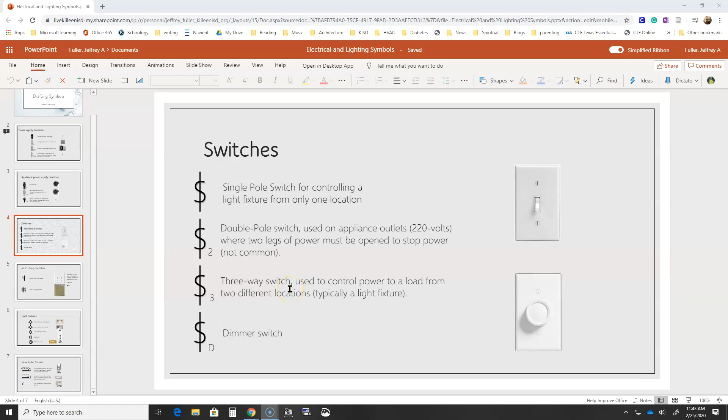Okay, now the next page, I've got some of those multiple gang switch boxes. So this box right here is a 2-gang. This one down here is a 3-gang. Okay, and you may have some of those in your house.

But this is a double gang light switch. It may have two single pole switches in it, or it may have a combination of switches, such as this example that I got here. If switches are two-way or three-way, it must be indicated at each switch symbol.

So if you have a triple gang box, in this instance right here, you may have a three-way, a two-way, and a single pole. Well, actually, probably not a two-way. And again, as I said, those are very rare. But you might have one single pole, a couple of three-ways, or maybe two single poles in a three-way, or maybe a single pole two-way or single pole three-way in a four-way. So that would have to be indicated at that box.

But again, these are single gang. This is a single gang. And these are 2 gang, 3 gang down here. You can have multiple gangs. I've seen them personally with as many as 6 switches on a box. And that's it for actual lighting symbols and comparing them to what they would look like in real life. Now let's get over to Revit and I'll show you how to place these.

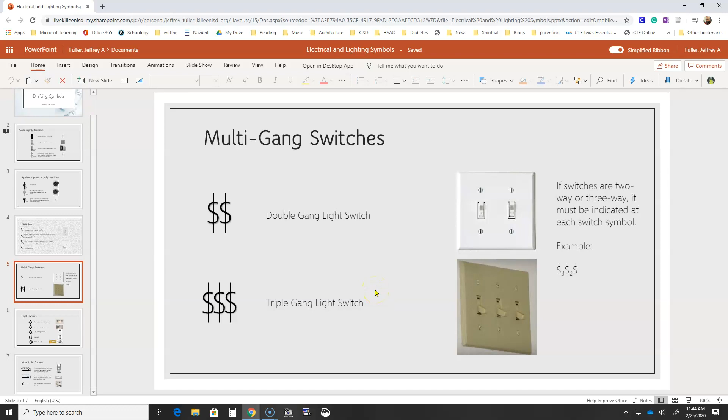Alright, so let's place some switches in order to control our light fixtures. Here in the living room, typically the living room is a place that you will find uses for 3-way, sometimes even 4-way switches. Okay, and you'll have to think about, where would I want to turn this on and off from, and then of course have the different switches and things like that.

So here in the living room, you'd typically want to be able to turn it on coming in the front door, and you'd probably want to be able to turn it on coming in from the kitchen and even coming from downstairs. So there's basically 3 locations, but 2 locations primarily that you'd want to control those lights from so that you can turn them on before you stumble over the furniture. Which, if you remember, I hid the furniture for the living room, so the furniture is still there. And I'll show you how to unhide that in just a moment.

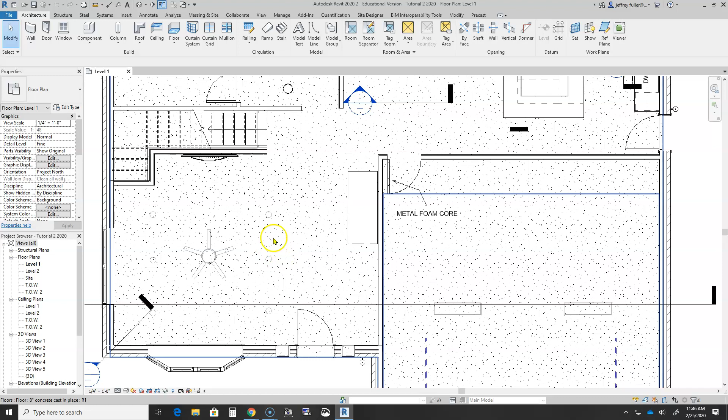But I'm in the living room right now, and a couple of things I can do to help myself out along the way is, I may want to hide some of my elements, such as the floor, in this case, because it can get in the way of selecting some of your light fixtures and your fans and stuff like that. And of course there's lots of things like that involved in using Revit. So it's kind of like turning layers off in AutoCAD, but we're turning elements off in Revit.

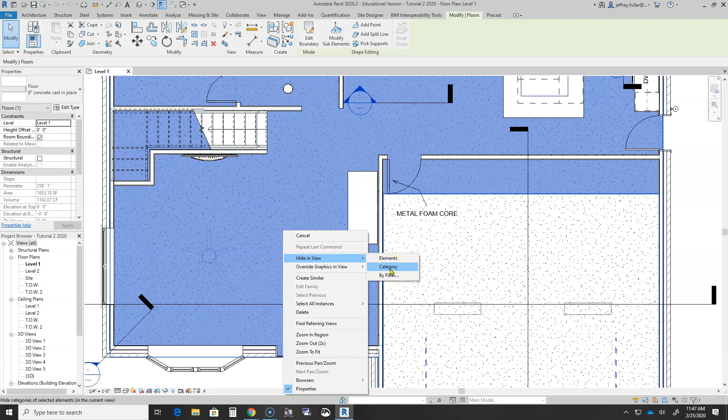So I'm going to right click on the floor, and I'm going to say hide in view, and I'm going to say category, because I'm going to hide all the floors while I do this, so nothing gets in my way. Now I think this is just going to do it on the first floor. I thought maybe it would do it on both floors, but I'm going to hide the category, so I see no floors at all whatsoever. Now they're just hidden; they're still there. And that way, it's easier for me to select individual light fixtures and what have you.

I don't know why those stairs light up every time I hover over my light fixtures, but maybe we'll find out sooner or later. Anyway, let's put some switches on this wall right here. So I'm going to go to the components. No, I'm not going to go to the components. I'm going to go to systems. Systems tab right up here, about the 4th one down. And we're going to go to devices, electrical fixture. And when they say electrical fixture in that application, they mean a receptacle or a switch.

And I'm going to come here and go down to the type selector. And you can see right now I have a 3-way switch that's already kind of preloaded in there. If I want to load more, and actually what I do as I'm doing the electrical, because I will come across instances where I need different switches and different receptacles, I'll go to load family.

So we're going to go to the electrical folder, and we're going to go to architectural, and we're going to go to, I think, electrical power. Yes, and then we're going to go to terminals. So your light switches and your receptacles are considered terminals. Now we're strictly going to work with light switches first in this video, and then the next video I'll go over some receptacles.

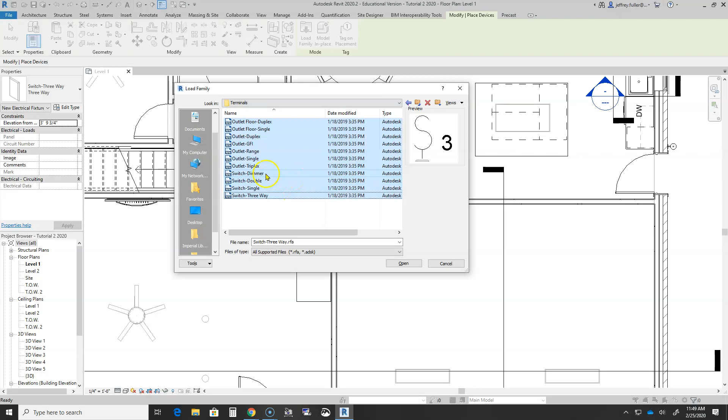So I'm just going to go ahead. There's only, I don't know, what is that, 12 or so electrical fixtures. I'm going to go ahead and select all those and click open, and that just puts them in the job. So when I go to select them, I can actually select them all over here through the type selector. So now they're all inside the type selector.

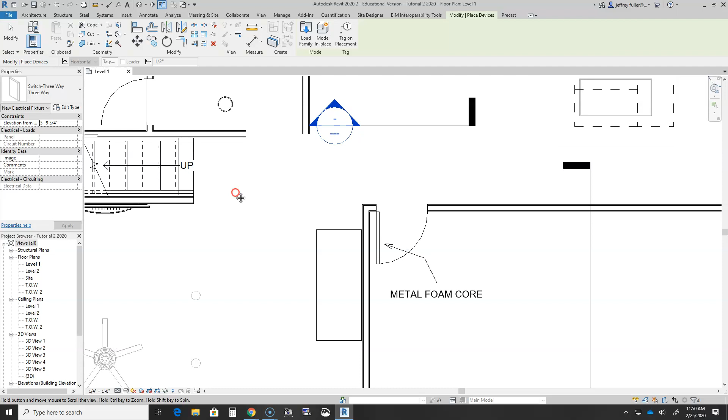Okay. What I want first is a three-way switch right there at the bottom. And I am going to put a three-way switch here that's going to control, let's say, the fan. And the fan also has a light fixture on it. So I'm going to put a three-way switch here. And that switch itself is just going to control the fan fixture. It's going to control the light on the fan, and it's going to control the fan.

Now, if I wanted to control those two separately, I would actually put two switches, one for the fan and one for the light that is on the fan. But I'm going to just use the pull chain on the fan to control the lighting and the fan itself.

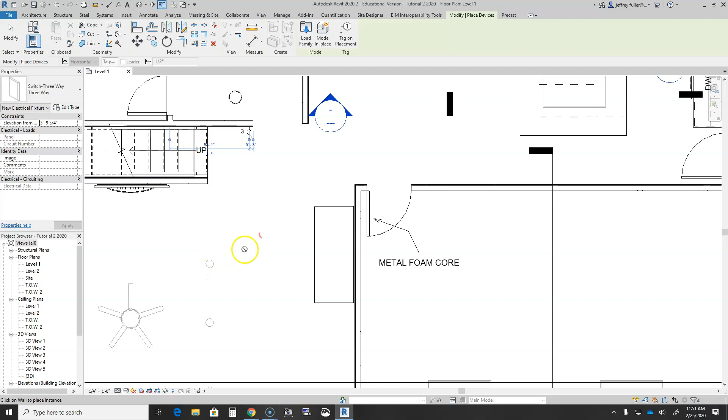Okay, and next I have these can lights in here. Now I don't have to control both the fan and the can lights from two different locations. I primarily just want to be able to turn the lights on so I can see from two different locations. But then again, I might want to have full control over everything in those two different locations. So I'm going to put another switch for the can lights, and I want to give it room so you can see it and read it.

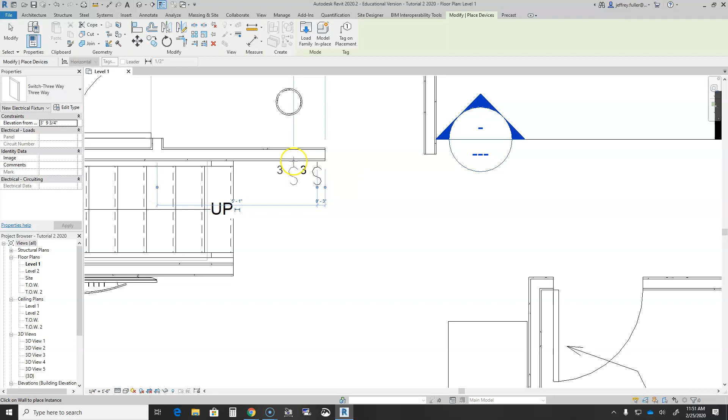Now this does not mean that they're going to be placed on the wall this way, and I'll show you how we deal with that. And of course most electricians would know when you have multiple light switches on the design on the paper like this, then that means they're going to put it in a multiple gang box.

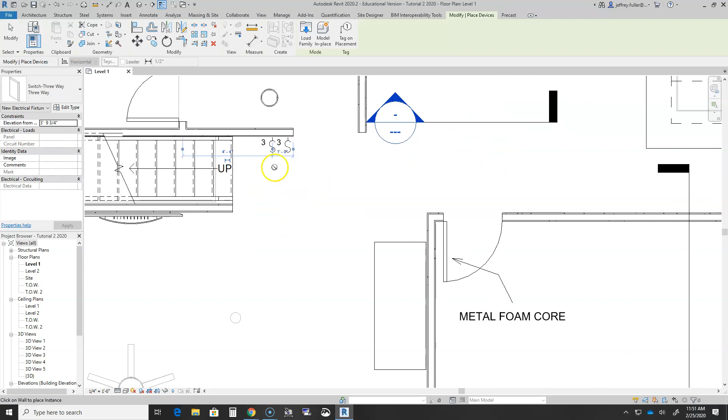So that's two three-ways. I also have to think about the stairway lighting. There is a light up at the top of the stairwell, and I probably need to put a light somewhere here in the middle because you don't want to walk up dark stairs. So that includes yet another three-way switch. So far I've got three three-way switches on there.

One switch for the fan, which controls both the fan and the light on the fan. One for the recessed lights, and then one for the stairway light. Again, that's up here at the top of the stair. Hopefully it would cast enough light to be able to illuminate most of the stairs. But if not, I'll think about putting maybe a sconce or something here on this wall.

All right, now that I've got those light switches in place, of course I would want to go through the house doing the same thing in all these different rooms. Same with the kitchen. I'll probably want to control the lights in the kitchen from multiple locations, so I would use a three-way. Bedrooms are a little bit different. Okay, bedrooms typically you just control from one location.

So I might want, say, a switch double, switch single. So just a single pole switch. And the namings on some of these are kind of confusing because people who make the models for these come from different backgrounds, and they kind of talk about things in different contexts. But there is a triplex. No, that's an outlet. I thought there was a double.

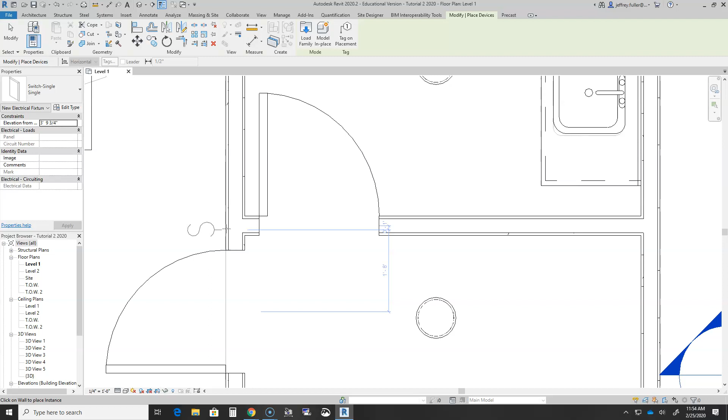You don't have to worry about height. Revit knows how high to place these, and we will talk more about that in just a moment. But I'm just going to put a single switch in there, and that's going to control the fan. Well, maybe I want one switch to control the actual fan blades and one to control the lighting. So there I would put two single pole switches right inside the door and indicate that as such as well.

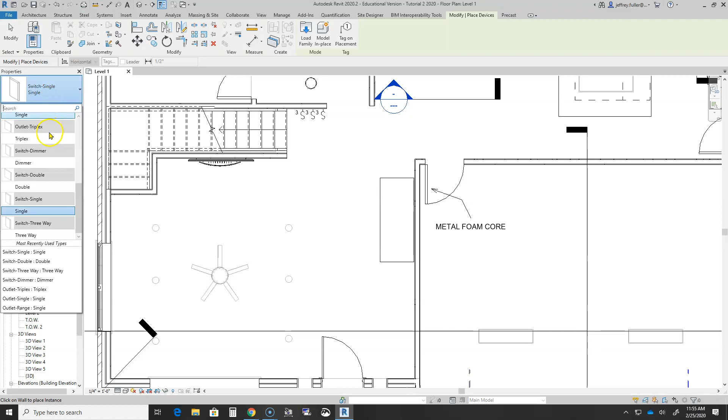Back to our living room. Of course I need a second location for some switches. So I'm actually going to go back to that three-way switch right here. And I'm going to put some switches right inside the door. Now, this is important. I don't think my door should be facing this way, so I'm going to double click to get out of the placement switch tool. I think this door should really be facing that way. Okay, and it just works better that way. And then I can put my switches right here on this wall.

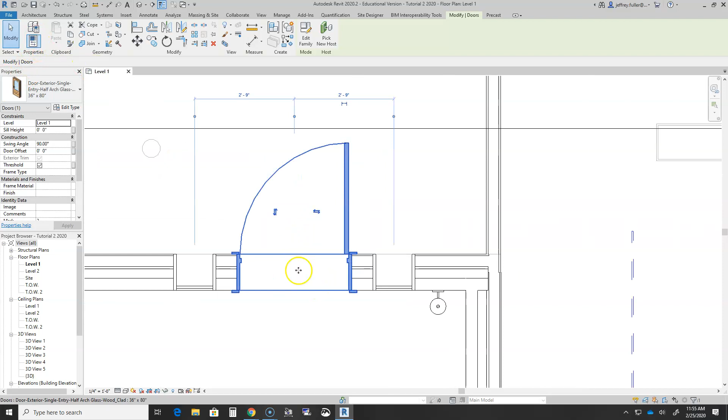Now, of course, I'm not sure how many switches we'll be able to get in here. They might have to be installed over here on this wall. The electricians could actually make that decision once they get on site, and that is because I have these sidelights that are basically windows, and there's not a whole lot of space between those windows and my door.

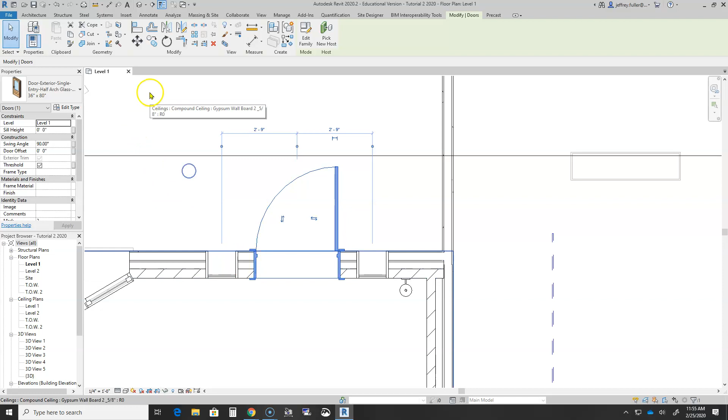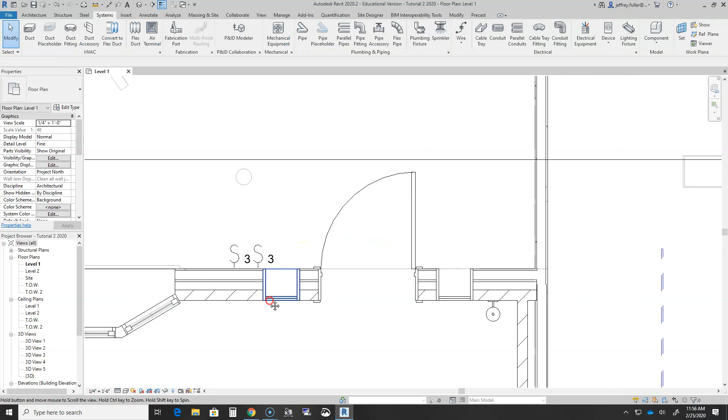So I'm going to go back to my systems and my electrical device, and I'm already on a three-way switch. So let's see, how did I do it over here? I had a three-way for the cans and a three-way for the fan. So I'm going to just place these three-ways along this wall and put enough space between them so that you can see them. And I might actually tidy that up just a little bit when I get rid of that one. Okay, so there's two three-way switches.

I don't need to control the stairway from here. But I do have an outside light fixture right there that I need to control. That's going to be on a single pole switch. So I'm going to go back to lighting devices, go to that single pole switch, and put a single pole right over here. And actually, I want to change the order of that around. I think that single pole for the outside light should be first, and then these two can scoot over.

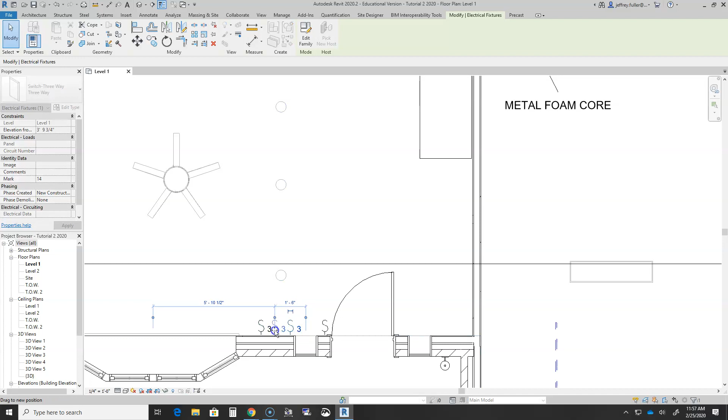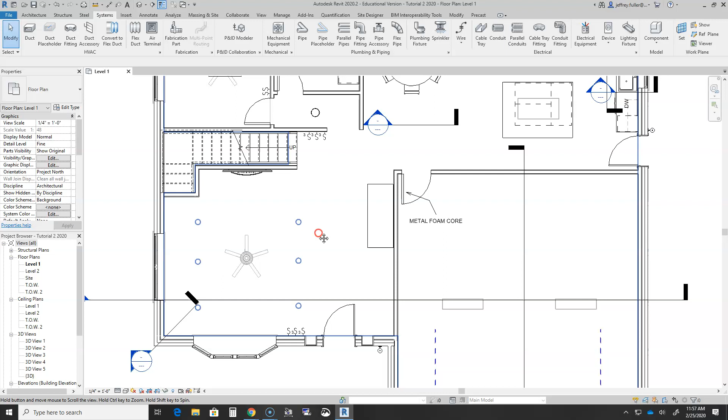Okay, and I'll come back later and put an annotation on this, and I'll cover that when I go over annotation in the video, but I'll annotate some of these to give further instructions on what to do. Okay, so now that we have some switches in place, I can show you what to do with the wire. This is the wire tool right up here, and still we're in the Systems tab. Click on wire, and I always use the spline wire. That's almost exclusively what I use.

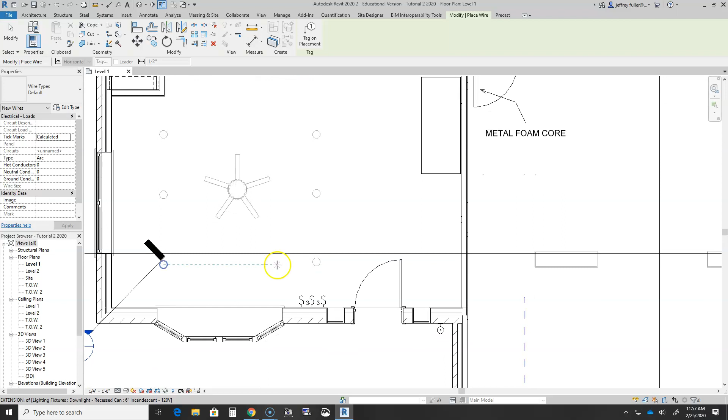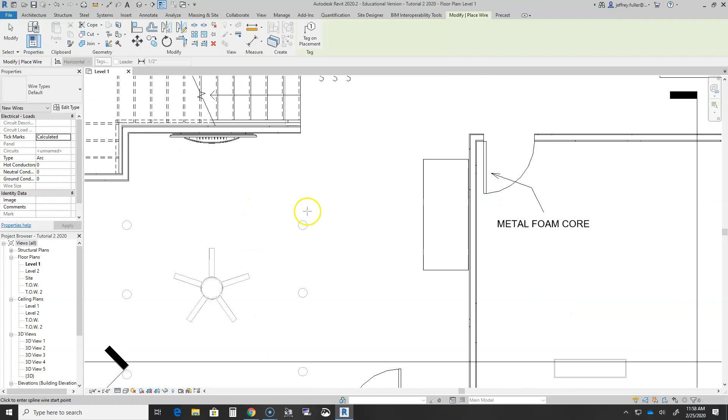And as I use these wires, it's very important to put curvature to the wires to make them, one, look kind of like wires, and two, so that they don't get confused with anything else in the drawing. So we can look at it and say, okay, that's definitely a wire, because it's going to the light fixtures from the switches, and it's kind of squiggly looking. Okay, so let's start up here. I'm going to use this three-way switch on the end to control the lights.

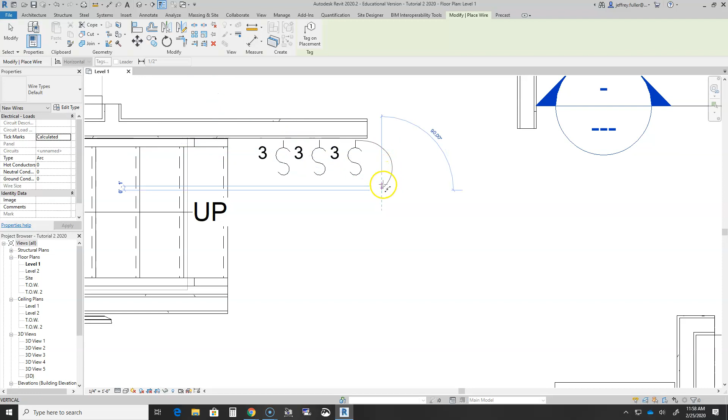So I'm going to click at the base of it, and that's where my wires can come out of. And I'm going to do a lot of clicks. So every time you click, you create a turning point. So basically, I clicked 4 times right in there because I wanted to come out from that switch, obviously. I want them to be able to see these wires.

And then as I go, I'll increase that distance between clicks. And I'm not going to make a zigzag line or anything like that. I'm just going to put some curvature to it. All right. And now as you click, I just hooked it up to that first light fixture can. And then I have to click on the can again to start it all over, and kind of go in place some more curved lines.

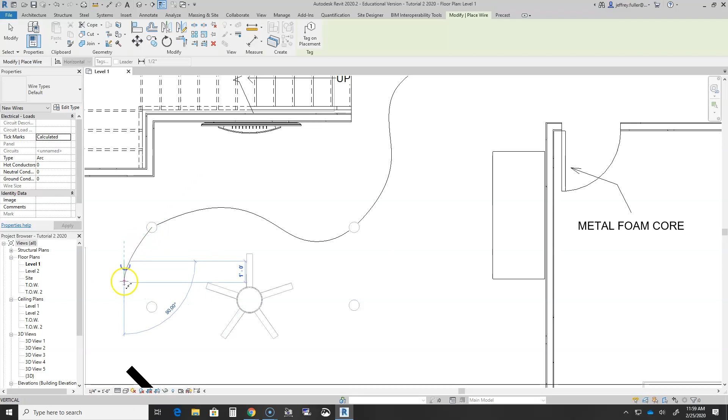And as you notice, I'm kind of doing this neatly. I'm not making these zigzags all over the world. So I'm kind of using a little thought in this. I don't want my plans to look like I'm unprofessional. Okay, so I'm going around to each individual can. Okay, this is the last can.

Once I make it to the last can, I'm going to circle around and go to this other three-way switch. And I want to put a little bit more curve right there. So I'm going to put a few more clicks in it. Go right to the base of it, and that'll be fine. Okay, now to finish that, you just right-click. I thought... Okay, hang on. Now hit the enter button. Okay, now enter button, that'll terminate it and you get out of it. Okay.

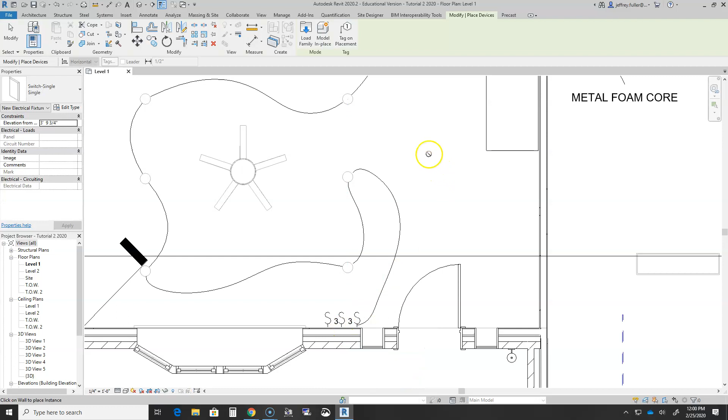So here we are. We have wiring from that one three-way switch going through one time through all the light cans and then back to this other three-way switch. All right, next I'll do this other three-way switch, and this is for the fan. Okay, so I'm just going to click at the base. I'm going to kind of snake it out the best way I can to keep it from crossing. Oops, I actually just made a bunch of copies of that. Let me undo. There we go. I forgot to click on the wire again.

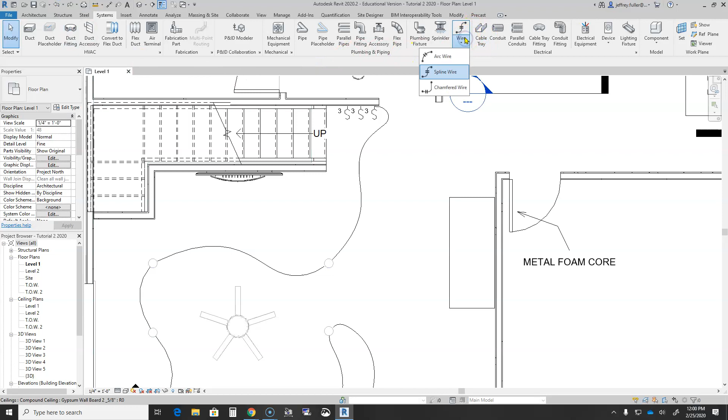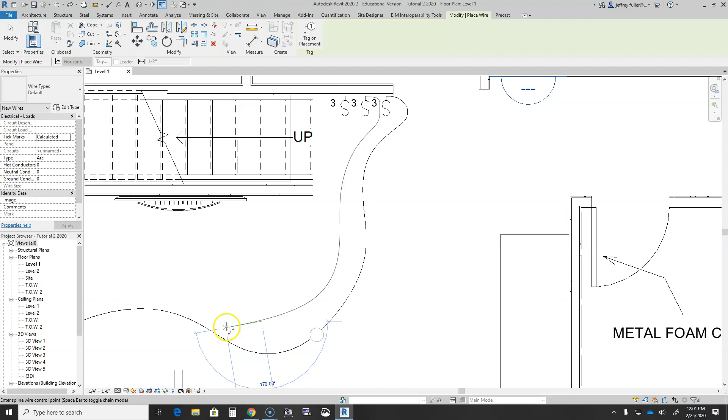So spline wire, base of the switch, and then come out and just kind of click it several times to get that nice curve. Okay, and now I can start breaking that apart and just making some more spaces. Okay, now here's what I'm going to do. I've got to cross a wire. You don't want to cross a wire if you don't have to, but when you do cross a wire, you need to do something like this. I'm going to come up kind of close to the wire, put a click there, and then maybe another click right here. Click here, click here. Okay, so two really quick clicks.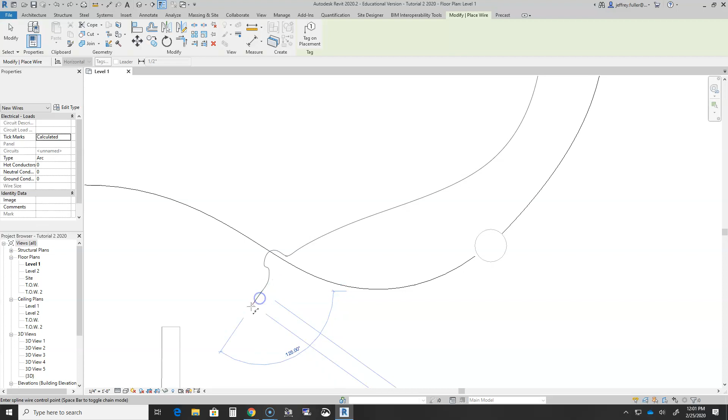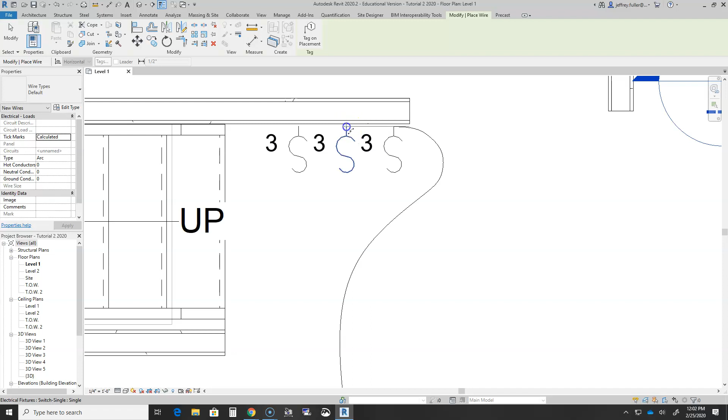And what I'm doing is I'm forming a loop around that. That's probably not the best loop. There are other ways of doing that. One thing I could do, let's go back a click or two. I'll tell you what, let's just undo it, start over. So again, spline wire. I know y'all love to see me start over. Okay, quick succession of clicks to get it curved right around all that. Excuse me. Start spreading those clicks apart.

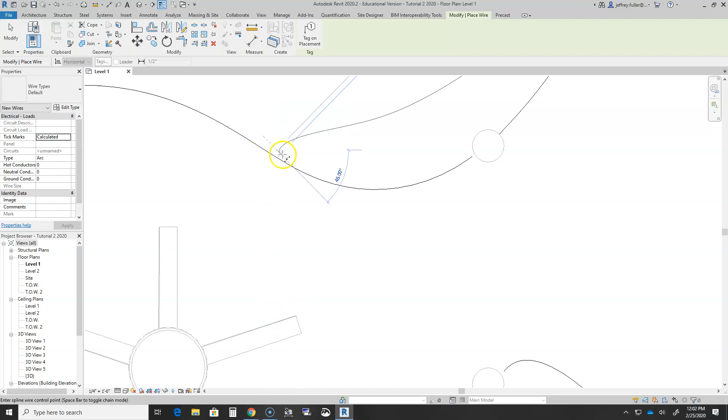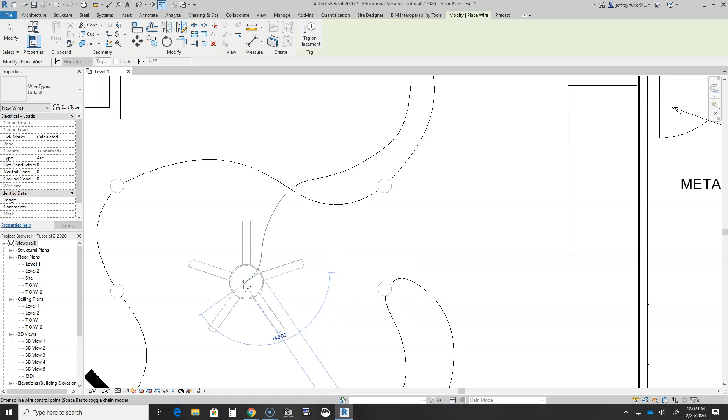Okay, I'm going to have to cross the wires right up in here. So I'm going to bring it up right up to the wire, close to it, not all the way to it. I'm going to hit the enter button. Okay. All right. Now I'm going to start. I don't know how I got off of that, but start spline wire again. This time I'm going to start right here on the other side of the wire. Okay, put some more curves in there, go to about the center of the fixture, and then enter.

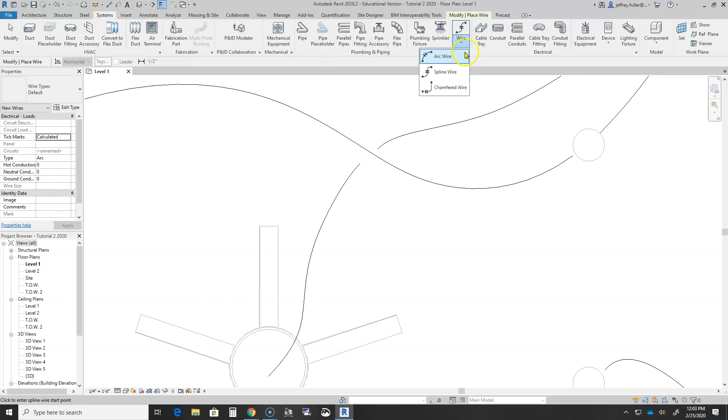All right, now what I can do is go back to the wire again. I don't know why it keeps jumping out of wire. Oh, we got to go to systems, spline wire. And actually, on this one, what are some of the other options there? Arc wire. Let's do an arc wire, because what we're going to do is just create a single arc from here to here. That didn't work.

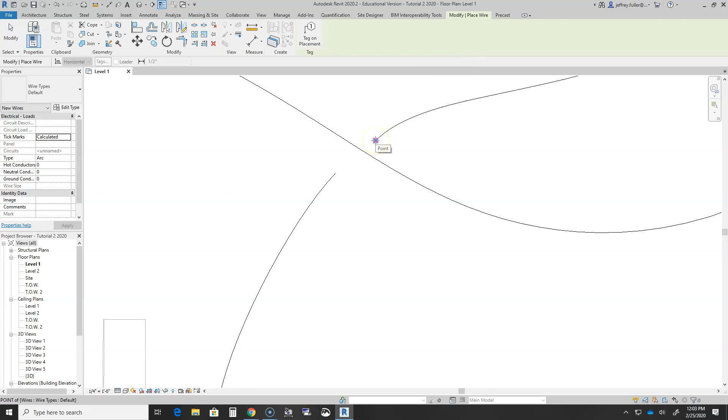Okay, let's delete that segment. Arc wire again. Maybe I have to go here. Okay, up here and then here. There we go. So you got to click on that second point right up there as well. And I didn't quite make a good connection, but we can probably fix that. There we go. Okay, so that tells me that this wire comes and goes over that wire.

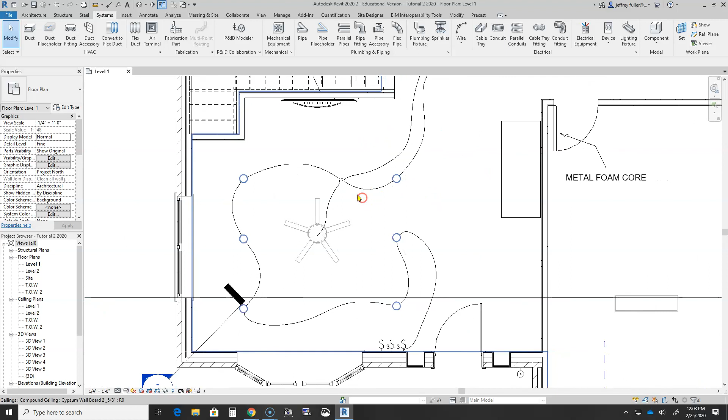Okay, so it's important to put those crossing sections. Now, whether or not they're going to actually pay attention to that and make this wire go over that wire is a different story, and it's not really important. The important thing is that you're indicating where one wire crosses over another, so that they can plainly see where the different wire directions are.

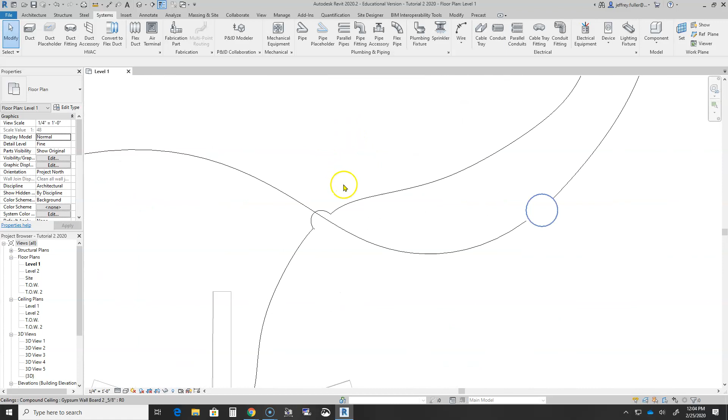Sometimes you can cross them over so closely that this wire crosses over this wire, and it kind of blends in and looks like it goes along with this wire, which it does not. So always put that little crossing thing right there. All right, so those are our three-way, and actually I haven't finished that particular three-way, so I got to go back to spline wire, go back to the center of the fixture.

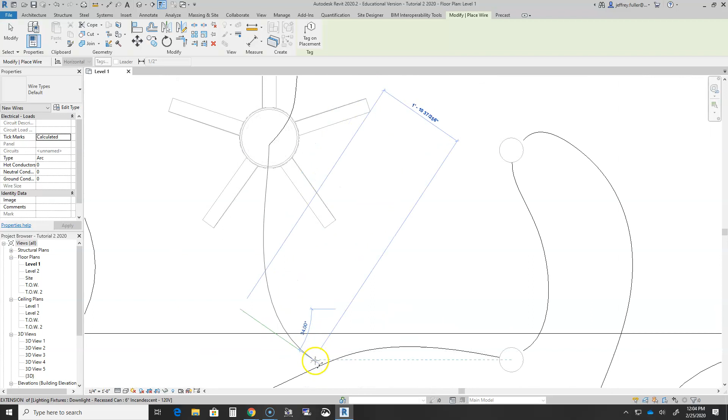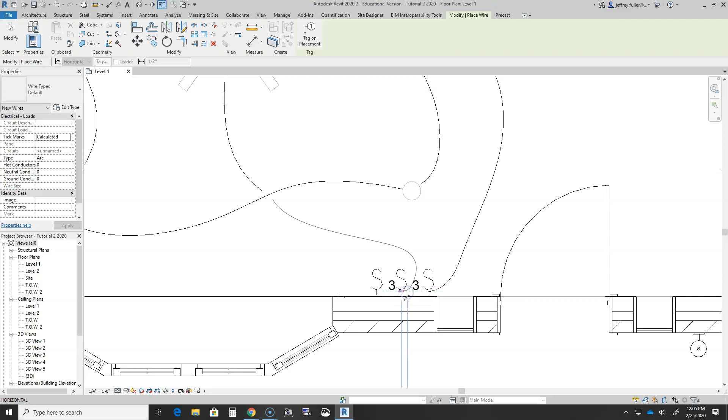Okay, and I'm going to have another crossing over here. So I'm going to take it close to it, hit the enter button, and I'm going to pick it up again over on the other side. A lot of quick successions of clicks until I get it to the base. Okay, and again we need to put that

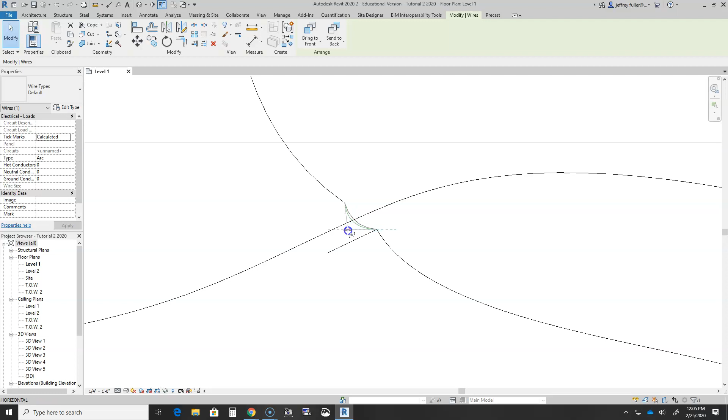arc on there. So we click at the start point, click up here at the midpoint, and then click down here. And it didn't make quite as much of an arc as I wanted it to, so we'll just kind of make it arc a little bit more. All right, so there we go. And I think I can get rid of that. There we go. All right, so finish that one. Now we're finished with the three-ways.

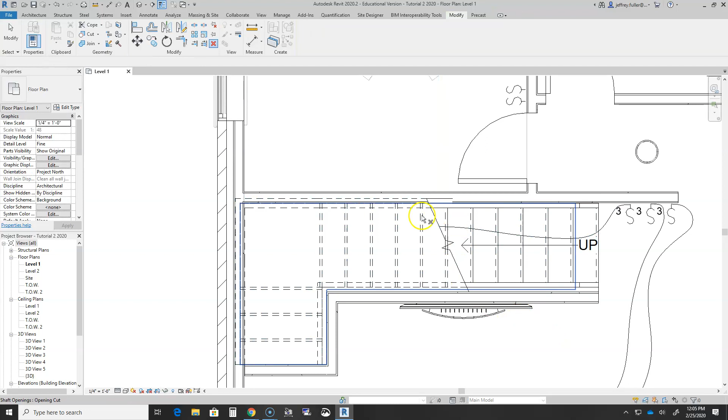And I would do this too on the stairs going up to the upstairs. This one, I'll go ahead and draw it out, because it's going to meet another wire coming from downstairs. Okay, I'm going to come out. I'm not going to run it all the way upstairs. I want to stay clear of that up symbol as well. And I'll end it right there where that cutoff is, that separation line or that cut line.

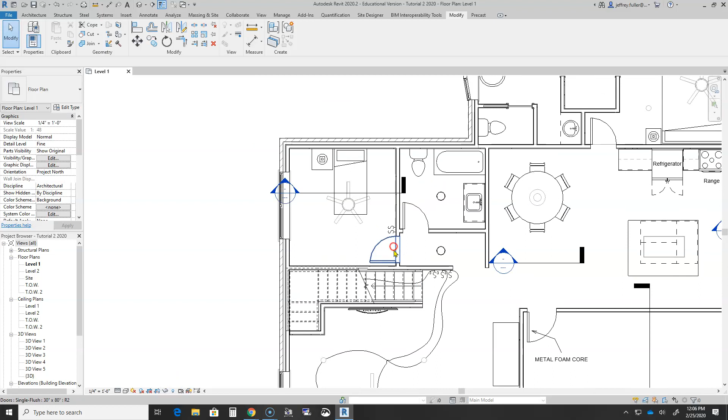And then on the second floor, I'll have a wire coming from this fixture up here going down to that point. Okay, and then they will understand what that means when they see it. Okay, so yes, hallways, they get light switches as well. I haven't done a hallway light switch because I don't really need to right now. But I am going to show you the single pole and how that works.

So the single pole, it's real simple. Now, some people think that you need to go to the fixture and then circle back around and come back to the switch. No, that's not how it works. Okay, so I'm going to click on the base, quick succession of clicks to make a good curve right there. I can spread those clicks apart and go to the fixture. And then I will start another wire for the fan.

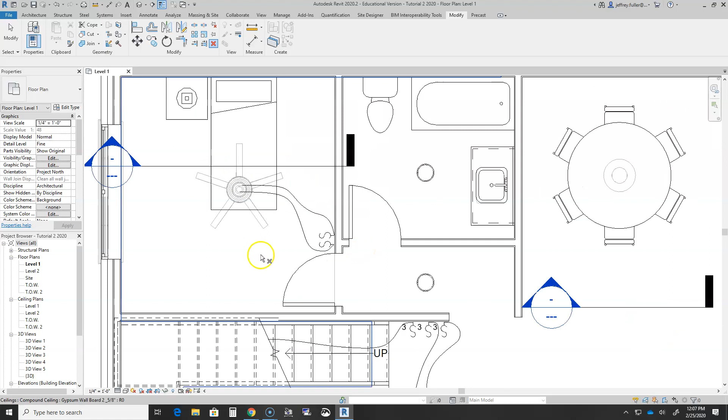Okay, so this one's going to control the fan. And I'll indicate that too in annotations, which switch controls the light, which one controls the fan. And then enter. Okay, so basically the switch to the fan is just one wire. One wire for the light, one wire for the fan, unless you just want one switch to control both the light and the fan, because I can easily just allow the occupant to control the fan with the pull chains with just a single switch.

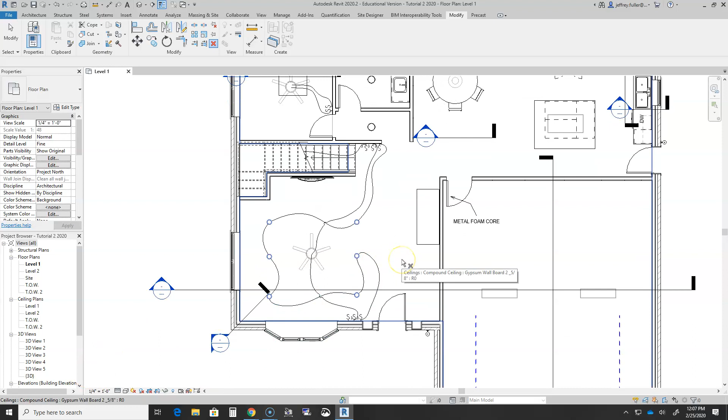Okay, so that is light switches in a nutshell. I know that was a long video, but there's just a lot to go over and a lot to do. I hope I didn't bore you too much there.

But anyway, let's get our lighting done, and I'll come back on the next video and show you how to do the receptacles. That one should be a short one because it does not require wires. It's just simple placement of receptacles throughout the room.